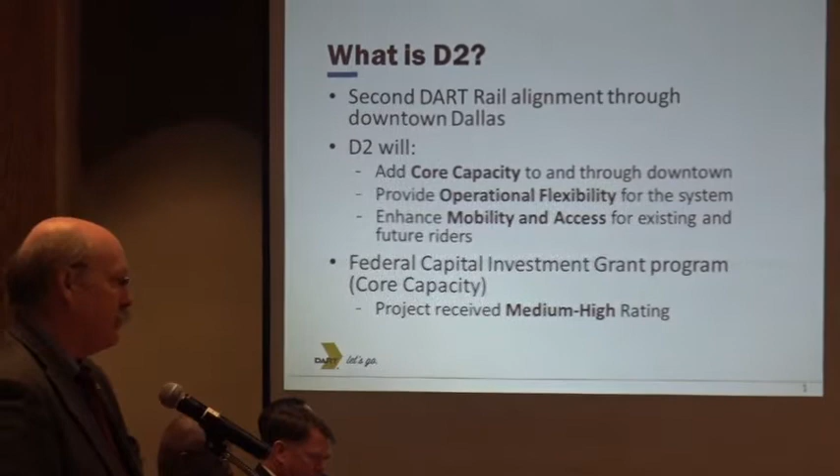So first slide is what is D2. Gary gave you a quick highlight of it, but there are three key phrases that I'd like you to take away from this. One is it is all about core capacity. We are trying to expand the ability of our system to handle more trains, more people, more riders coming through the downtown. As you know, we run on a single track mall today, and anytime there's an event that stops traffic on the train tracks itself, we don't have any way to get by it.

So that brings us to the second point, which is operational flexibility. The second alignment, as we are planning it, would allow for trains to bypass the mall and go down a new alignment that would bypass whatever incident was occurring. In addition to that, it just provides for additional mobility and access. By putting in the second alignment, we open up new areas within the Central Business District for additional stations, but also as we are expanding the streetcar system with the City of Dallas, again, opens up more within the Central Business District for ridership.

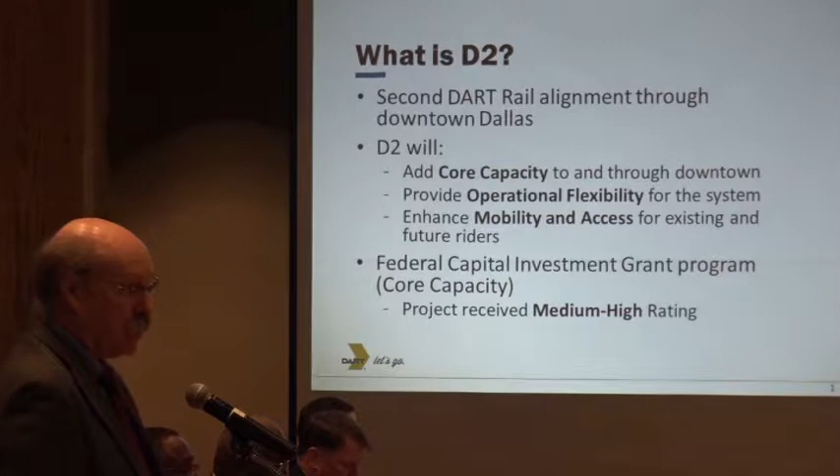One thing to note, we are seeking federal funds for a portion of the project, approximately 50% capital investment grant funding out of a core capacity program, which fits very nicely with the type of project that we are trying to advance. This map is certainly dated, but I take you back to where we were a year ago. This was the preferred alternative adopted by both the City of Dallas as well as the DART board, and it was a partial tunnel and partial at-grade alignment going through downtown.

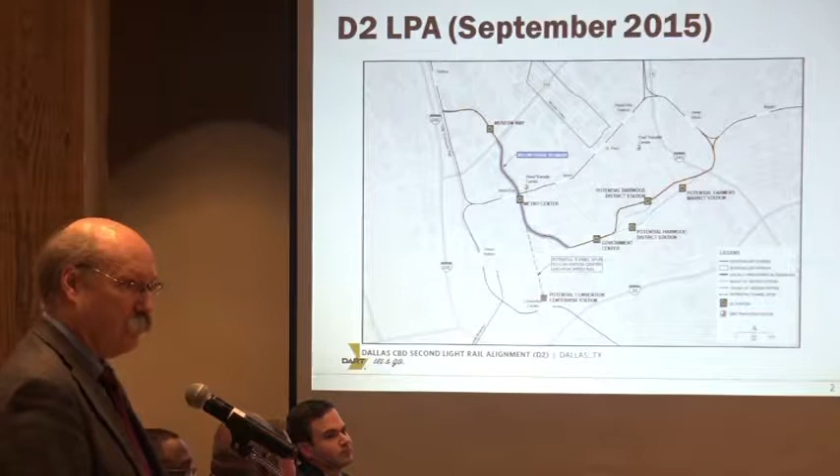About last year, after we've been working on it, the City of Dallas, based on public involvement and involvement from a number of residents and business interests, said that really the alignment ought to go into a full tunnel. And so that's what we've been working on for roughly the last 6 months, is to come up with an alignment that would reflect a tunnel. And so this is the language in part out of the resolution that says that between Woodall Rogers and 345, it needs to be in a tunnel as best as possible.

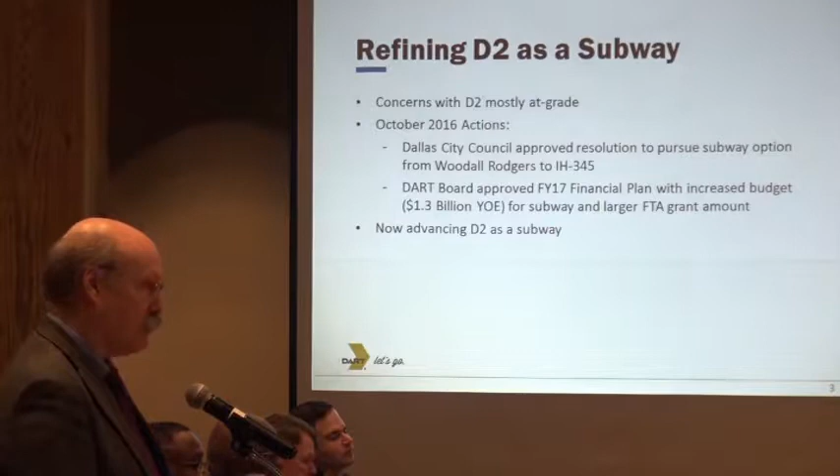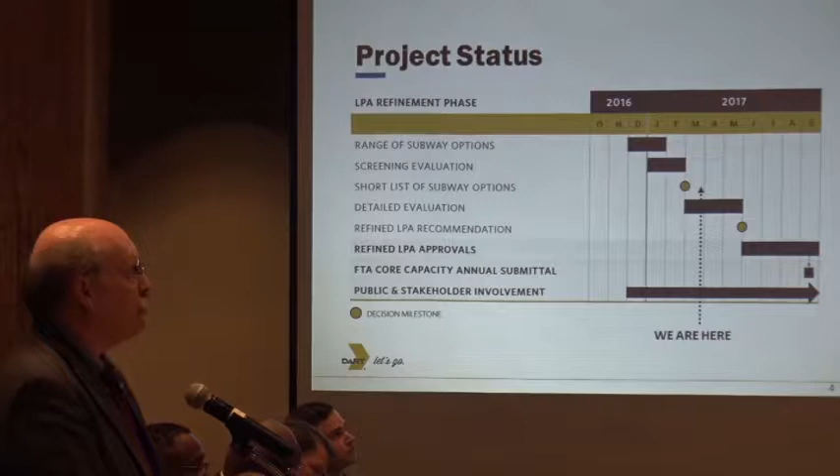In addition to that, the DART board set a budget for the project of approximately $1.3 billion. And as I say, we're seeking 50% of that funding from the Federal Transit Administration. Now, this is a quick highlight of the schedule. We are here, we're at the end of March, if you will. You'll see the yellow dot that shows up at the end of May. That is our target where we'd like to take the universe of alternatives, all of the good ideas, if you will, and narrow it down to a single alternative so that I can submit it to FTA by September.

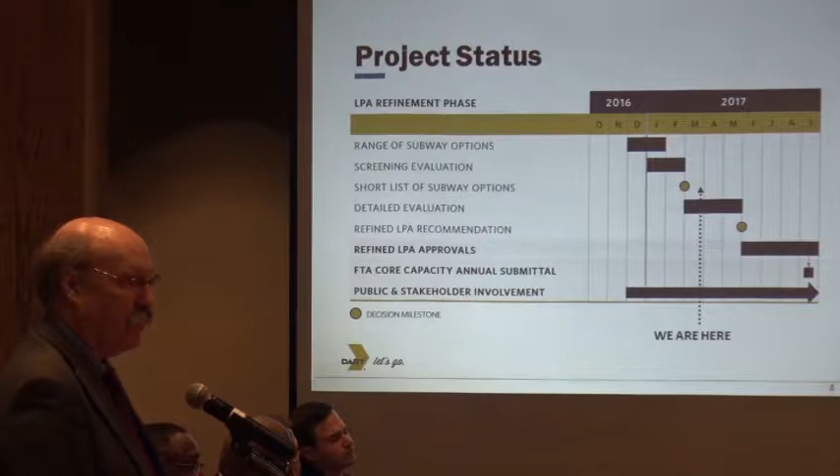We are on track. We are going to hold a meeting tomorrow. I'll talk about that in a moment, but we are moving per the schedule. This is the range of alternatives that have been identified or where we are today. There were many more lines on the map a few weeks ago.

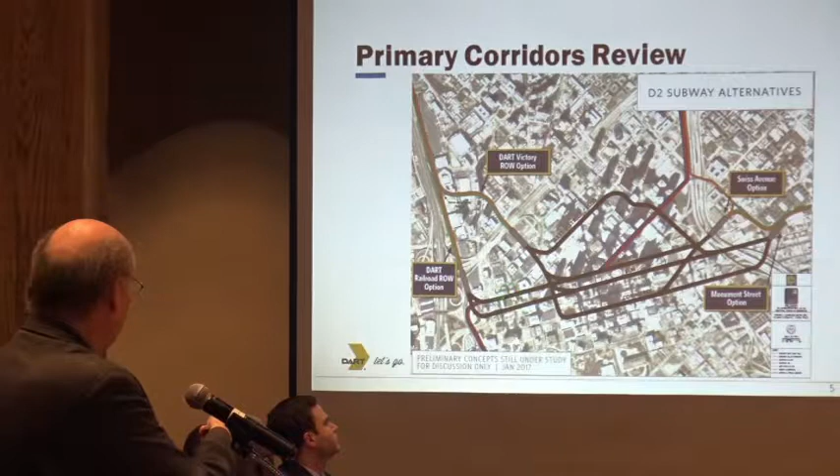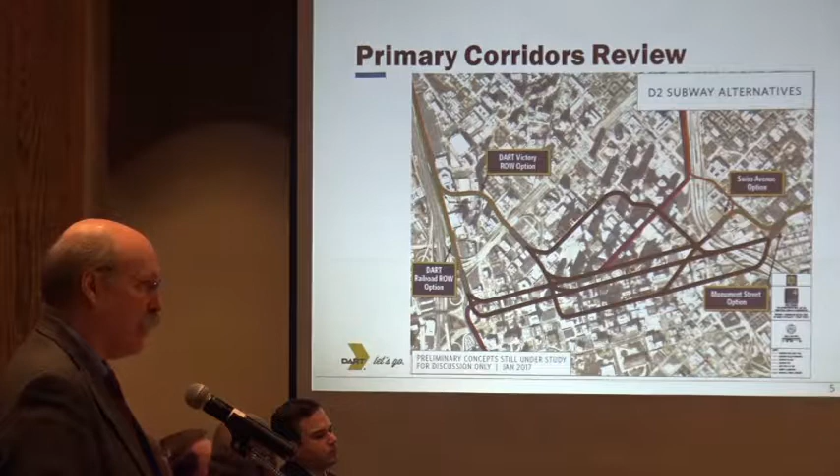For reference, this is the railroad track. This is Woodall-Rogers. What you see right here is the existing mall through downtown, Union Station down here, and we are right here. So one of the things that we'd like to highlight in this range of alternatives that was defined is that there are some technical limitations as to how you construct a tunnel, especially in a central business district, and I will highlight those.

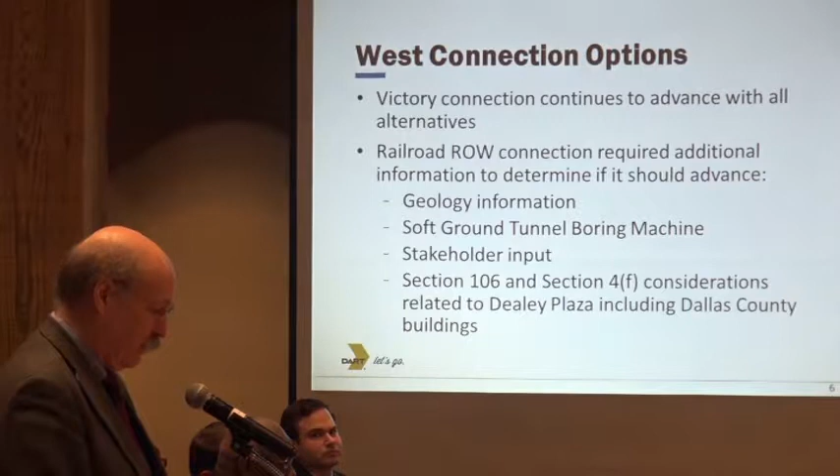First off is in the West End, we are going to be looking at a range of tunneling techniques, and it's all determined based on the geology that exists below the surface. I'll have a map here in a moment, but there is good tunneling material and there is really lousy tunneling material, and I'll highlight where those things are. In addition to that, we're very sensitive to Dealey Plaza, Sixth Floor Museum, and the things that are at this end of town and their significance, and we want to make sure that we account for those as we advance the alternatives.

This is that map I referenced a second ago where you see it in green. That is Austin chalk material. That is very good tunneling material. What you see in the light brown shade, the tan, is clay soils. It is not very good for tunneling. Doesn't mean you can't tunnel in it. It just requires a different type of machinery and it requires a different approach to that.

One of the things that you'll note based on those alignments that I showed a second ago, if they start in the railroad corridor, they would start in the worst tunneling material and then transition into the good tunneling material. But what that means is that because the material in the railroad corridor is the worst, that sets the base for the type of material and tunneling approach that we would have to take. So it does create a little bit of a problem.

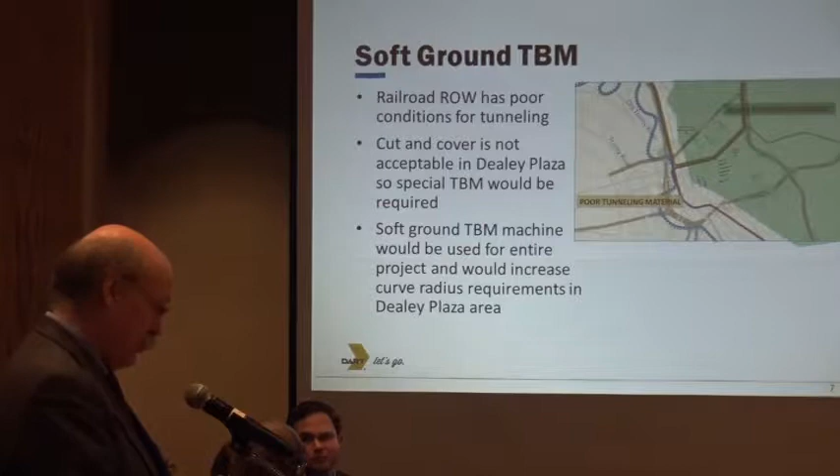The line that you see that separates the two is roughly Lamar. So it runs along a little shelf. And again, this is the alluvial soil deposits from the Trinity River over many millions of years from times gone by. I wasn't around at the time, but that's what they tell me.

These are two maps that start to focus in on the specific issues and concerns that we would like to make you aware of. First and foremost, what you see in the blue is the existing mall, so coming from Union Station up the mall or coming from American Airlines Center and coming up the existing mall. Several ideas that have been proposed are shown in the red illustrations.

So coming off of the existing railroad corridor, starting into a tunnel underneath Woodall-Rogers, being underground and coming across Dealey Plaza and then getting onto Elm Street. Another option is to continue straight underneath the Y and getting onto Elm Street. What you see in the green shade tone is Dealey Plaza, the historic landmark designation for the JFK Memorial site.

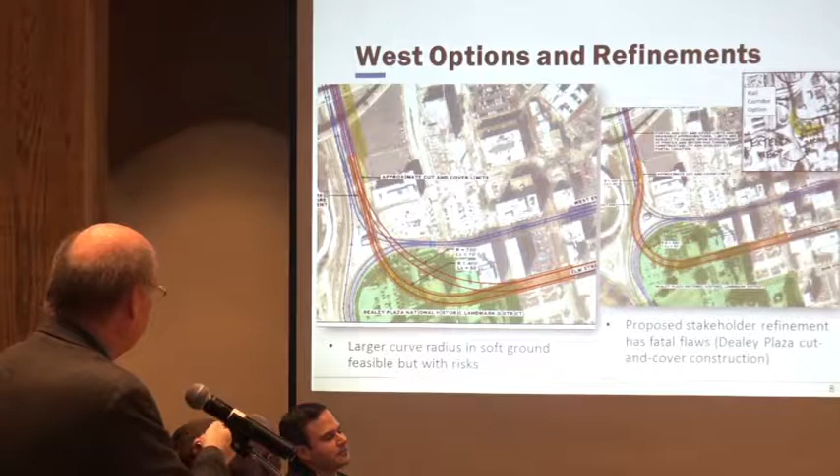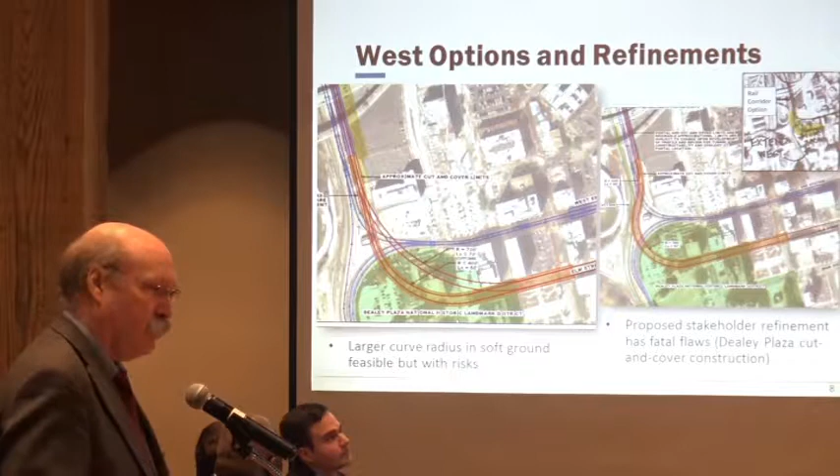But we looked at another alternative that would swing the alignment a little bit further off to the west before we came through Dealey Plaza. Again, this would be a cut and cover section. We are not advocating for that at all. So we think that is a fatal flaw to the alignments.

That being said, we've also received input from a number of entities, Sixth Floor Museum, and we just received a letter yesterday from Preservation Dallas that also discourages that particular alignment. I won't go into this detail, but these are certainly the federal laws that I'm most concerned about that would certainly affect any alignment in this vicinity.

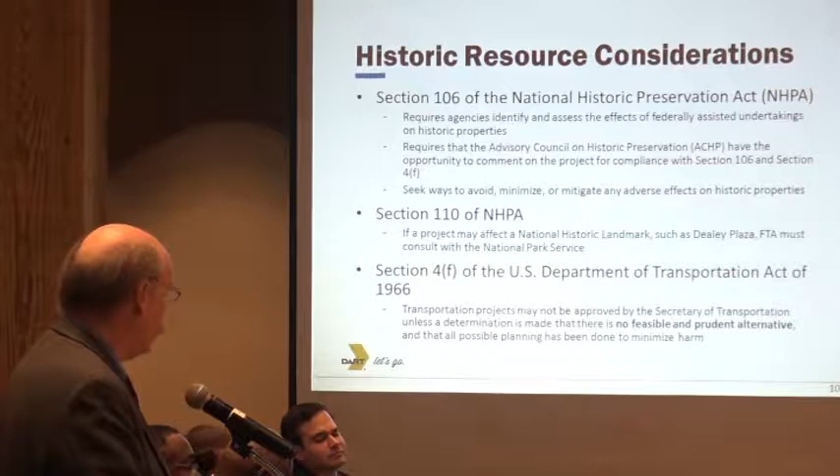We've had letters of support for what we call the Victory alignment, which would eliminate the need for us to go through Dealey Plaza. So DART owns this right-of-way as a part of the American Airlines Center Victory Development.

We branch off just south of the Victory Station. This is the Perot Museum. There would be a brand new station located there, cross underneath Woodall Rogers, and this is where we would start the tunnel. It would continue on down roughly Griffin Street, and I'll show that here in a second in a little bit more detail. What that does is it takes us out of the railroad corridor, takes us away from the historic resources of Dealey Plaza.

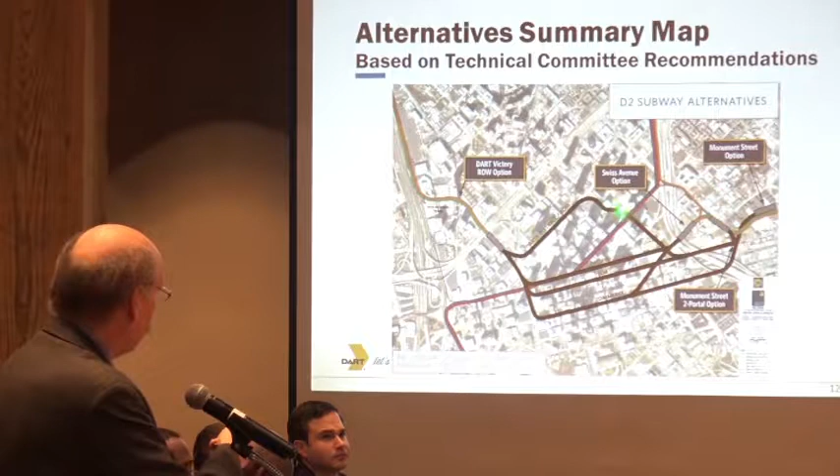And so what you wind up with is a range of alternatives where you saw a minute ago alternatives associated with the railroad corridor. We would advocate for an alignment that comes this direction and uses either Commerce, Elm, or Pacific going out and tying into the east end of town by what is now the Good Latimer Deep Ellum Station. There is another alternative that has been suggested, which uses Ross and then comes across. We don't think that alignment will necessarily survive the review process. Primarily, it doesn't solve the core capacity issues. It doesn't meet the FTA criteria.

So what we have tomorrow at 3:30, the county staff is participating in the meeting, is a review of all these alternatives and kind of where we stand relative to the ranking and rating of the alternatives. So what I'd like to leave you with is that we would love to receive a letter from the Commissioner's Court that would indicate your understanding of the significance of the issue and that you too probably don't think that going through Dealey Plaza with a cut and cover approach would make a lot of sense.

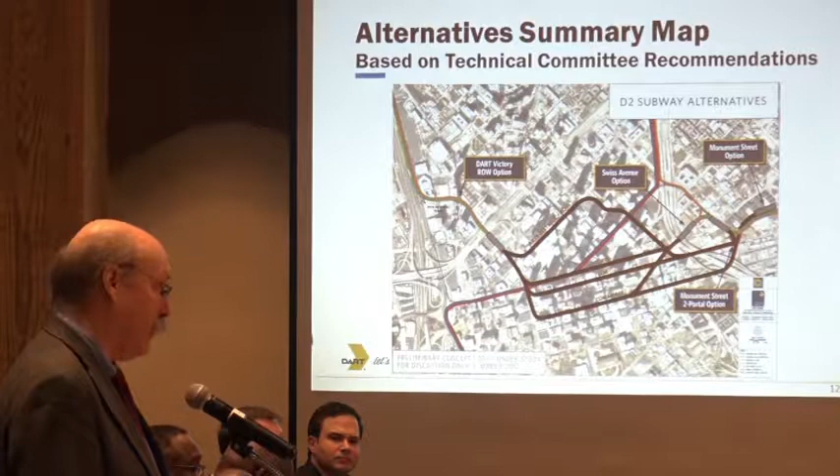Certainly love to hear a positive reinforcement of support for the D2 project. We'd like to have a letter by the May deadline, and if necessary, we'd also like you to consider a resolution at a later date in terms of how the support goes for the particular project and alignments that are identified. So I will leave it there. Glad to take any questions that you may have, and also indicate again that I'm happy to come back and brief you on this in more detail.

I recommend that you work on a letter with Mr. Bazan, and he'll present that to us, and we'll take a look at putting it on an agenda. Glad to do so. Thanks, Steve. Thank you very much for coming. Thank you very much. Appreciate it.

It's good to see Gary Thomas and you, Mr. Salin, again. And I want to thank Mr. Bazan for working with you and bringing this presentation. And first and foremost, thank you for bringing us the short version. I read the long one, and trust me, it took me a long time. But I think, from what you just said, it's clear. Too bad on this side we have the lousy ground and tunnel options.

Definitely, we need to be sure as a Commissioner's Court, just for the success of the program and the mission that DART has in capacity and core, the D2 option probably will be the one. And, more importantly, the laws, including the transportation Section 4(f), are very clear. So we definitely will be working with you in eliminating all those components that will not be acceptable too close to this area because of the soil composition as well.

I would just like to say, too, that I don't envy your position of having to find the ideal route through historical buildings and established businesses and religious institutions and narrow roads and bad ground to have to tunnel through and all the other decisions to be made. But I think that everybody here, we all know that the transportation issues have to be addressed because of the issues of downtown Dallas, and figuring out a way to work through it.